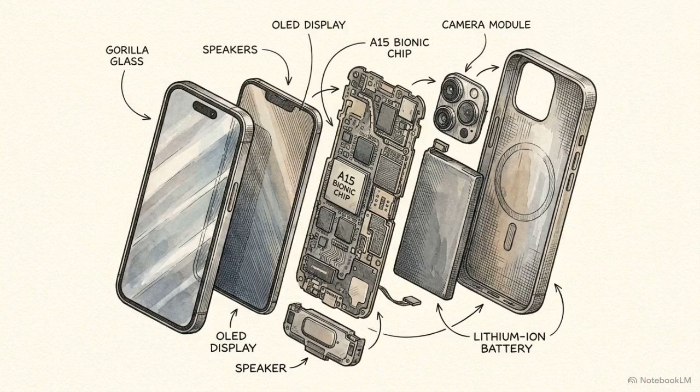When you walk into a store and pick up a new smartphone, it feels flawless. The glass is immaculate, the edges are perfectly aligned, and the software boots up without a single stutter. It's easy to hold one of these devices and subconsciously assume it was simply born this way, as if it popped into existence fully formed and pristine.

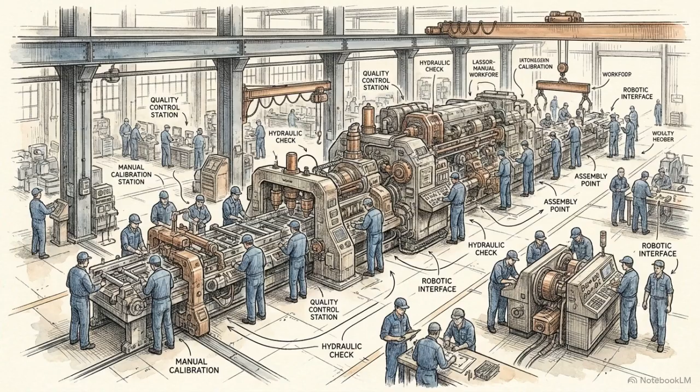But the reality on the factory floor is much different. Every single piece of manufacturing machinery is in a constant, relentless tug-of-war against physical decay, friction, and entropy. The sleek glass slab sitting in your pocket is actually a hard-won victory.

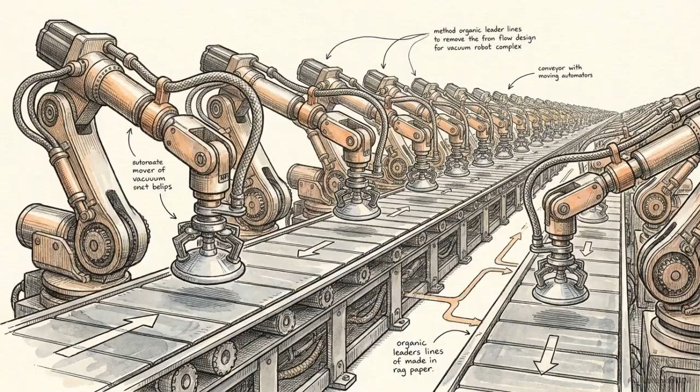That perfection is an illusion, carefully maintained by a hidden army fighting off catastrophic equipment failure every hour of the day. This battle happens inside massive industrial hubs like Chennai, India. These mega-factories run constantly, churning out millions of units through dense mazes of automated robotics and assembly lines. Amidst the thousands of moving parts, you have highly skilled technicians acting as the glue between human logic and machine precision. They monitor banks of diagnostic screens, ensuring the automated jigs stay within strict parameters.

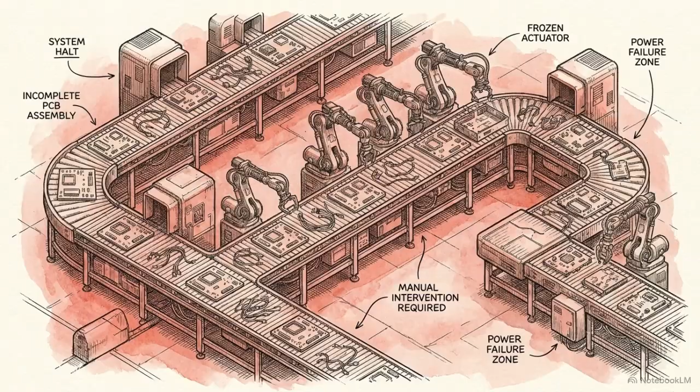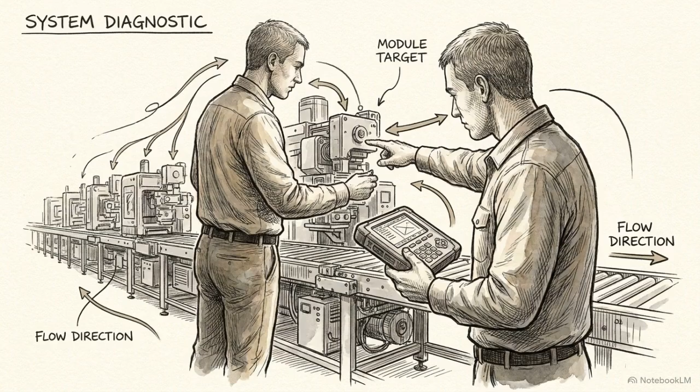Every minute the belt isn't moving, the factory bleeds thousands of dollars, supply chain schedules rupture, and quotas are missed entirely. With the belt frozen, the technician's role shifts. They now act as a crisis commander, holding the product's entire destiny in their hands as they race to identify the collapse.

When the alarms sound on an Apple iPhone 14 project, the directly responsible individual, or DRI, steps into the chaos. Instead of guessing, they execute highly specific, predefined test plans. The first step is electrical stress testing, the Hi-Pot test. Forcing a massive voltage surge through the circuitry checks the insulation. This data acts like a map, systematically eliminating healthy components to isolate the exact failing node.

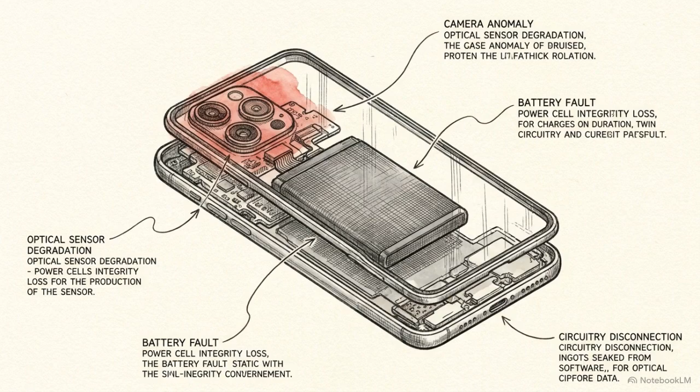The situation complicates as the rear camera module, the RCAM, begins reporting mass anomalies entirely independent of the battery fault. Simultaneous, seemingly unrelated failures can completely overwhelm standard debugging protocols. It creates a fog of war where fixing one issue might just mask another. To survive this, the engineer has to abandon basic checklist triage. They have to step back and find the invisible thread tying these random hardware faults together.

This requires a deeply logical framework known in manufacturing as the why analysis. You look at the final symptom and you ask why it happened over and over again until you hit the physical origin. The symptom: A-datum and B-datum films are pasting onto units with critical alignment issues. Margins are off by millimeters. The engineer traces the films to the automated pasting machines, discovering an erratic microstutter in the placement mechanism.

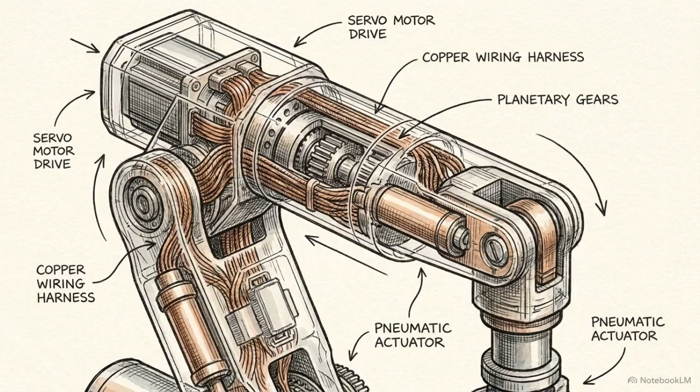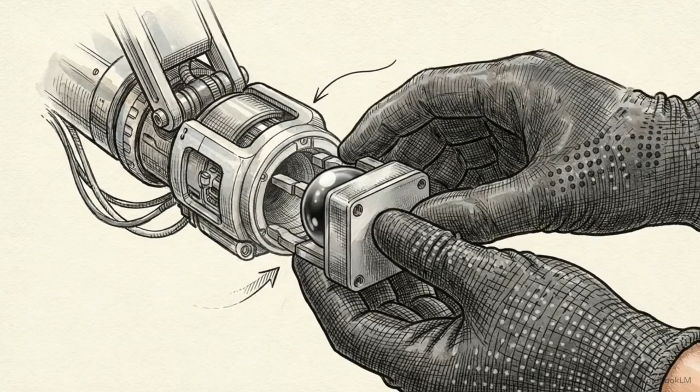Why is the machine stuttering? They dig past the software and inspect the physical hardware, finally identifying a deteriorating sensor that is feeding delayed coordinates to the robotic arm. With the true culprit exposed, the engineer pulls the correct electrical spare from inventory, swaps the failing sensor, and meticulously recalibrates the machine's operating parameters.

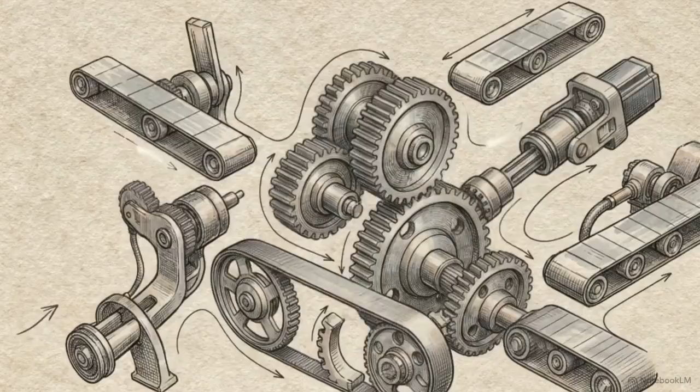Victory here requires more than a simple part swap. The engineer must ruthlessly hunt down and eradicate the root cause to ensure the line stays moving. The moment the recalibration is complete, the tension on the floor breaks. The line springs back to life, and the chaotic halt is replaced by the smooth, rhythmic hum of synchronized machinery.

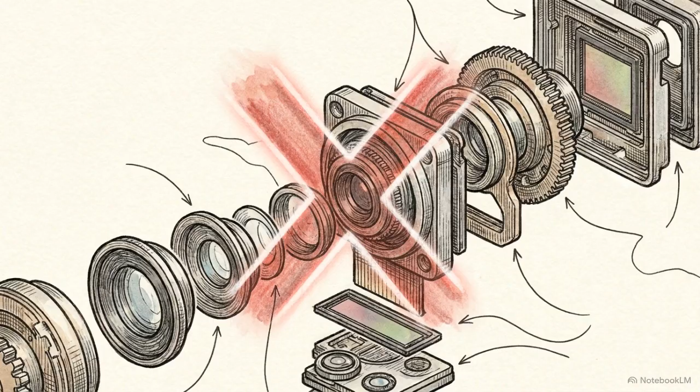An engineer knows they've won when there is zero physical evidence a crisis ever took place. They clean up the mess so perfectly that the final product reveals nothing about the chaos of its creation. Weeks later, a customer unboxes that exact phone, peels off the perfectly aligned protective film, and powers it on. That user will never know about the RCAM anomalies, the high-voltage HiPot tests, or the engineer who spent hours analyzing a robotic stutter deep into the night.

Meanwhile, the automation engineers are already back on the floor, running diagnostics, checking spares, and preparing to face whatever mechanical breakdown tomorrow brings. Our reliance on flawless technology rests on a fragile physical reality, one built through the relentless, unseen battles of the engineers guarding the line.